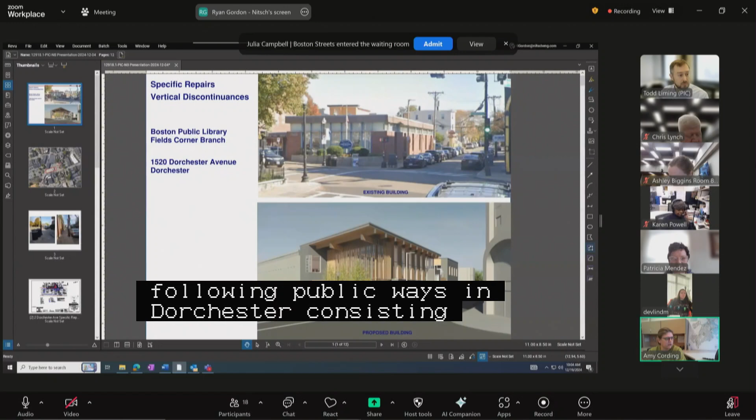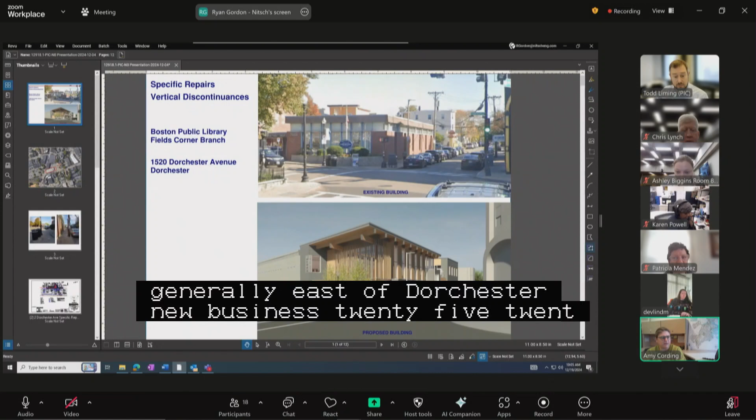All right, public hearings. Public hearing number 1 on a petition by the City of Boston Public Facilities Department for the making of specific repairs within the following public ways in Dorchester, consisting of curb realignment, sidewalk reconstruction, new and relocated pedestrian ramps, specialty pavements, street lighting infrastructure, street trees, planters, landscaping, traffic signal infrastructure, storm drain infrastructure, bike racks, trash receptacles, driveway curb cuts, and Silva Cell groundwater retention tree root protection system. Dorchester Ave at address number 1520, generally north of Park Street, generally east of Dorchester Ave, new business 12/5/2024, as shown on a set of plans entitled City of Boston Public Works Department Engineering Division Specific Repair Plans, 1520 Dorchester Ave, Public Way, Dorchester, 4 sheets dated November 22, 2024.

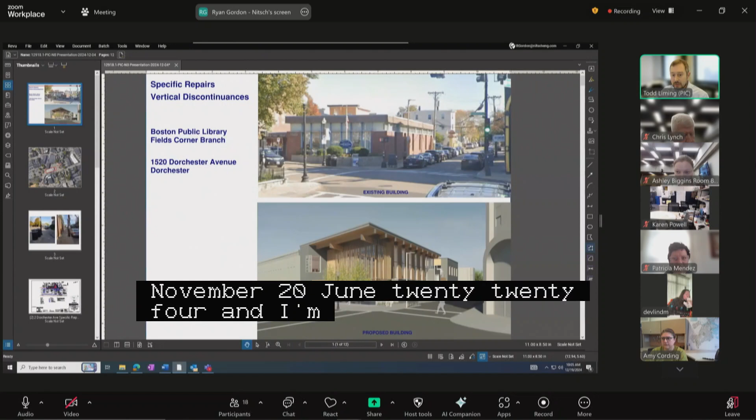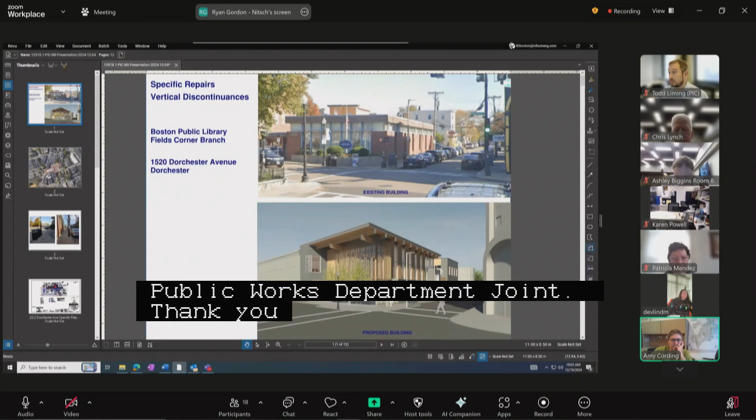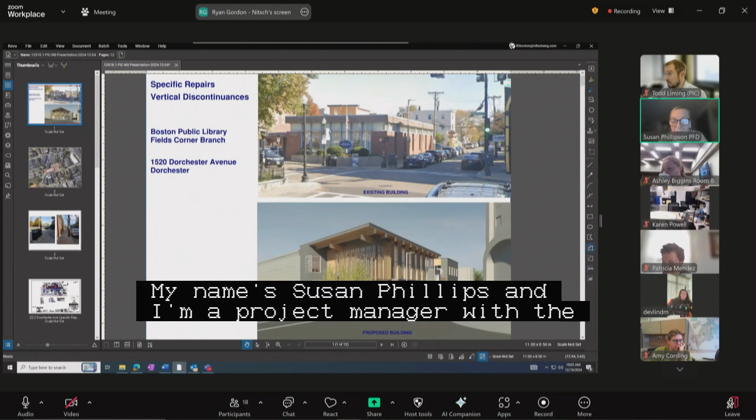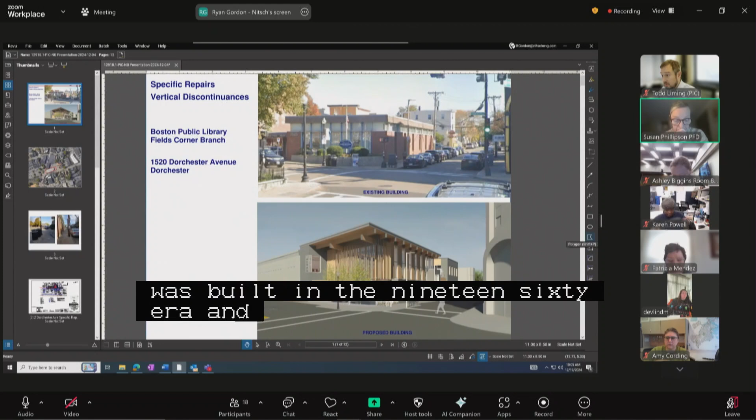Will the petitioners state their name and walk us through their presentation? Good morning, Commissioners, my name's Susan Phillipson, I'm the project manager with the Public Facilities Department, managing this project, the Fields Corner Library, located at 1520 Dorchester Ave in Dorchester, Mass. I'd like to give a brief summary: the project consists of replacing the existing single-story building, built in the 1960s era and currently 8,600 square feet, which will be demolished. The new Fields Corner Branch Library will be built as a replacement, programmed for approximately 14,700 gross square feet as a 2-story building. Thank you for your time, and I'll turn it over to Ryan Gordon of Nitsch, who can present the project's improvements.

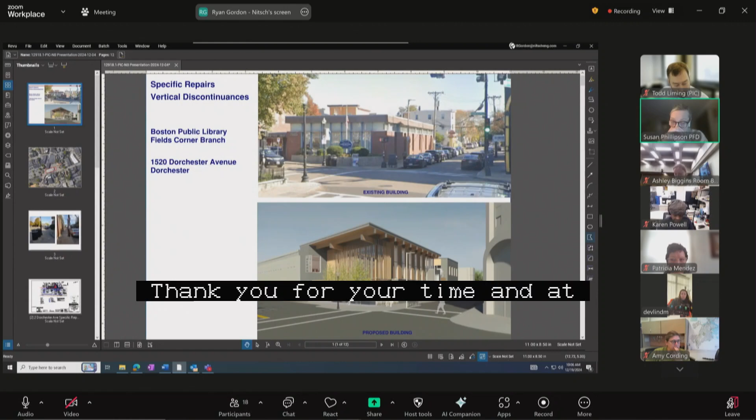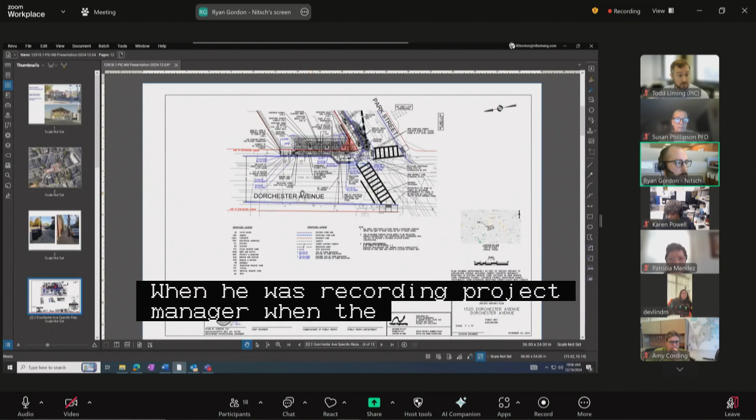Good morning, everyone, my name is Ryan Gordon, project manager with Nitsch Engineering. We have our specific repair plans here for Dorchester Avenue as well as Park Street. We have not made any changes to the plans from the new business hearing two weeks ago. The one update is that we are working with Chonglu on finalizing the LMI agreement for the trees on Dorchester Avenue. I'm happy to answer any questions.

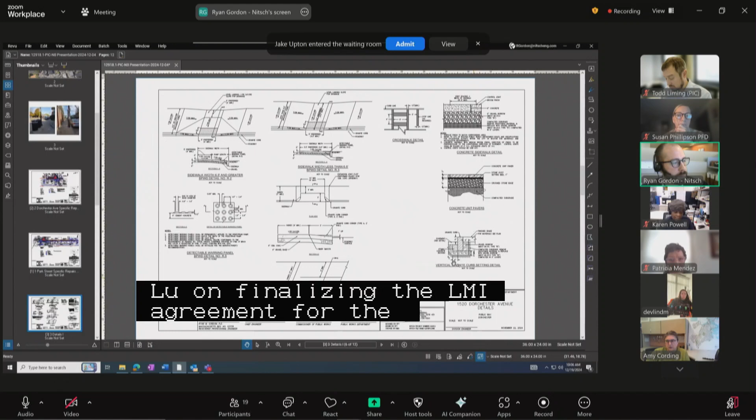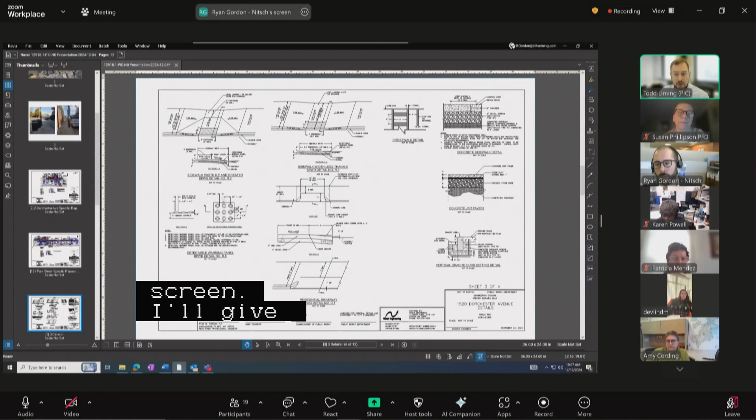Questions or comments by commission members, PIC staff, or the public? I'll mention to the public, if you wish to add testimony or ask questions, please use the raised hand function at the bottom of your screen. I'll give it just a moment. I don't see anyone, and I do not have any comments or issues with this action.

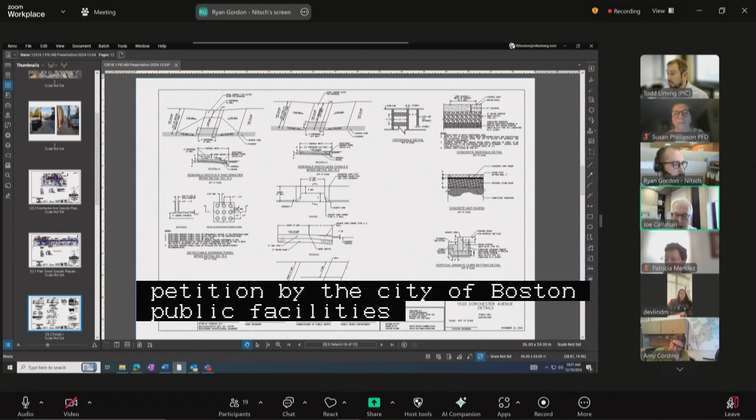I'll entertain a motion on public hearing item number 1. I make a motion to approve a petition by the City of Boston Public Facilities Department for specific repairs in the area of Dorchester Avenue and Park Street, as further read into the record by the chair. Second. All in favor? Aye. Aye. Great.

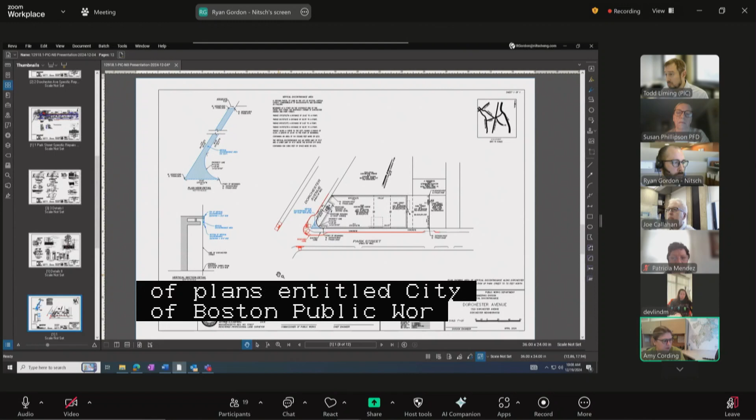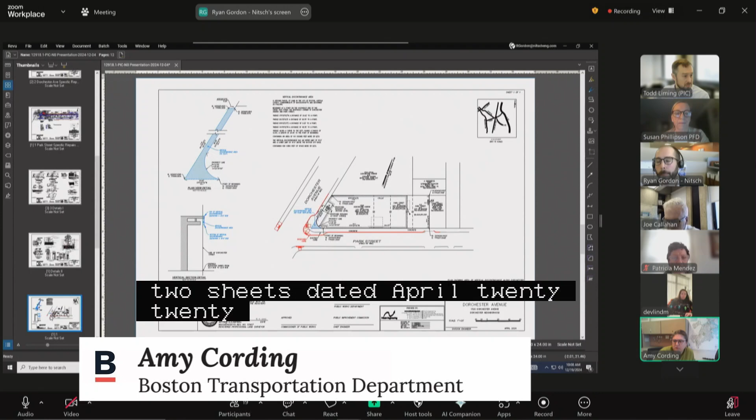Will the petitioner state their name and introduce their petition? Good morning again, Commissioners, it's Susan Phillipson with PFD. I'm not going to go through the summary of the project again, it is the same. I just would like to add that Chong and Boston Water and Sewer Attorney have reviewed and have no issues with the LMI. I just wanted to bring that up. I'll turn it over to Ryan.

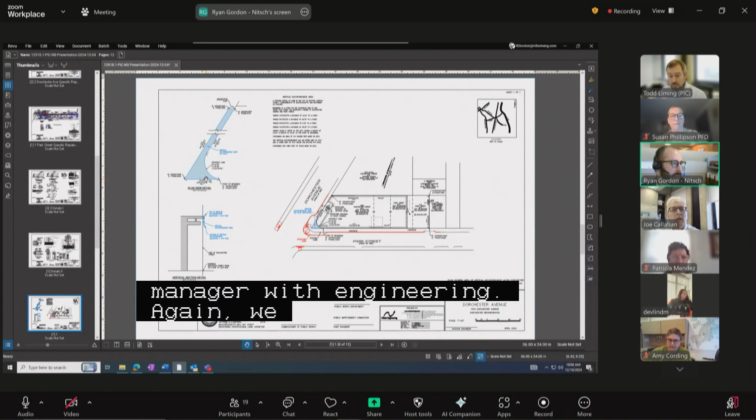Thank you, Ryan Gordon, project manager with Nitsch Engineering. Again, we have our vertical discontinuance plans, this is for the discontinuance on Dorchester Avenue. We have a plan and section here: 116 square feet and 696 cubic feet.

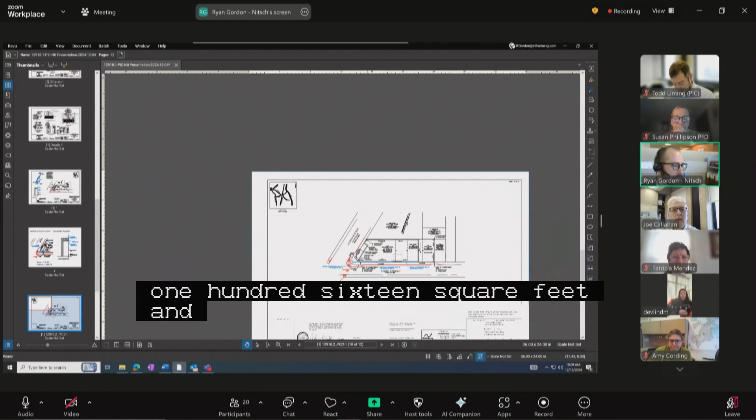And we have our 3 discontinuance areas with sections on Park Street. Here's a zoomed in version: 5 square feet and 20 cubic feet. The second one is a 13 square foot area with 255 cubic feet. And the third area is 7 square feet with 11 cubic feet total.

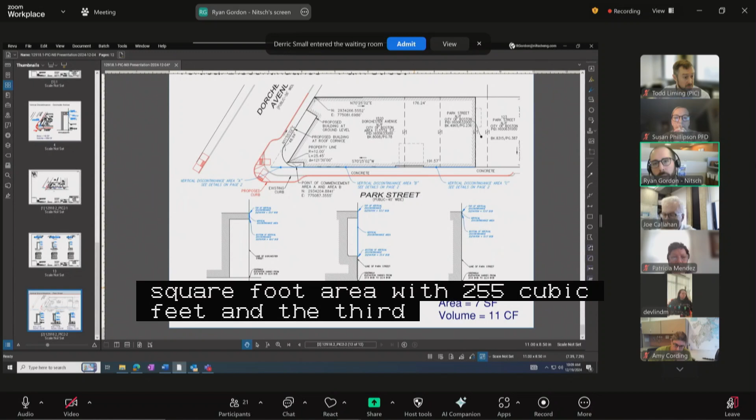And we have not made any changes to this from the new business hearing. Great. Questions or comments from commission members? PIC staff or public? All set.

I'll entertain a motion on public hearing item number 2. I make a motion to approve a petition by the City of Boston Public Facilities Department for a vertical discontinuance at Dorchester Ave and Park Street, as further read into the record by the chair. Second. All in favor? Aye. Aye. Motion passes.

Public hearing item number 3, on a petition by 9 McKay Place LLC for the acceptance of a pedestrian easement adjacent to the following public ways in East Boston: McKay Place on its southeasterly side at address number 9, northeast of Maverick Street on its northeasterly side, southeast of McKay Place. New business 12/5/2024, shown on a plan entitled City of Boston Public Works Department Engineering Division Public Pedestrian Easement Plan, McKay Place & Maverick Street, Boston, 1 sheet dated November 18, 2024.

My name is Brian Jones with Allen & Major. We're the site civil engineer and landscape architect. Maybe I'll share my screen just so. See, can I do that here? Yes.

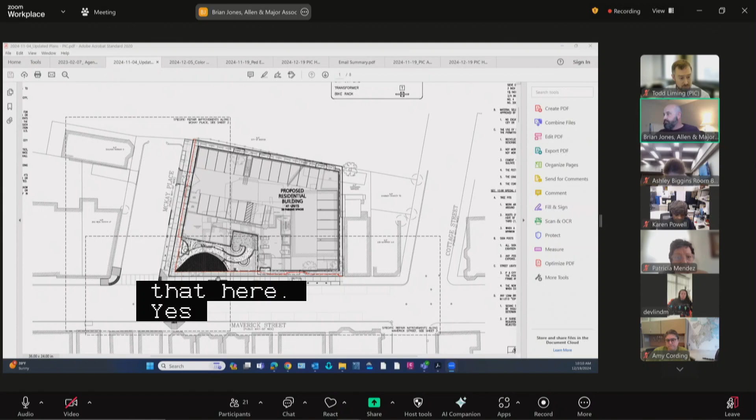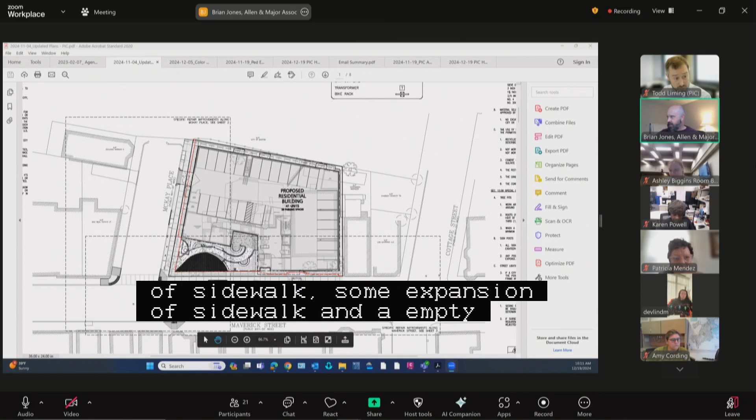All right, thank you. So it's a residential building, corner of McKay Place and Maverick Streets, 41 units, have some interior parking, and we're obviously here for work within the McKay Place and Maverick Street public ways. That work includes repair, replacement of sidewalk, some expansion of sidewalk, adding an MBTA bus stop, a bump out in the sidewalk, adding bike storage, outdoor bike storage, new street trees with some permeable pavement.

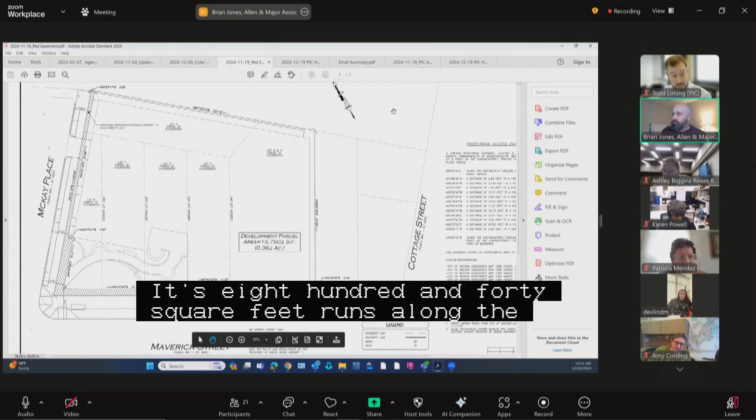So this section is just the pedestrian easement. Yeah, I apologize, then here it is. It's 840 square feet, runs along McKay Place and Maverick Street, and it's to accommodate an expanded sidewalk to provide at least 6.5 feet of concrete in addition to the pervious pavers that we have.

Great, thank you. Questions or comments by commission members? PIC staff or, oh, Joe? PIC staff or public? We're all set on the easement.

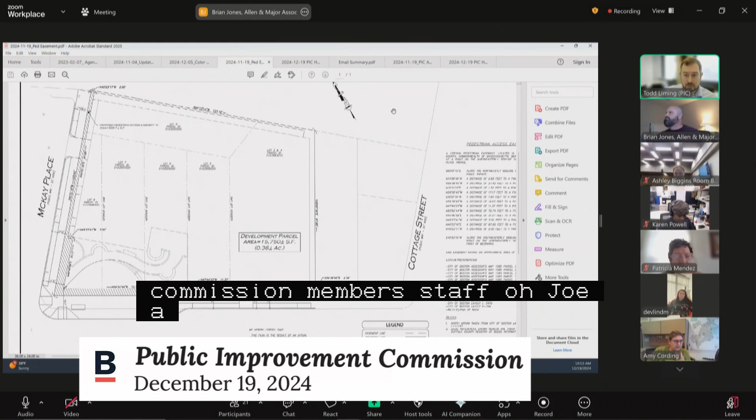I'll entertain a motion on public hearing item number 3. I make a motion to approve a petition by 9 McKay Place LLC for the acceptance of a pedestrian easement at McKay Place and Maverick Street, as further read into the record by the chair. Second. All in favor? Aye. Aye. Aye. Motion passes.

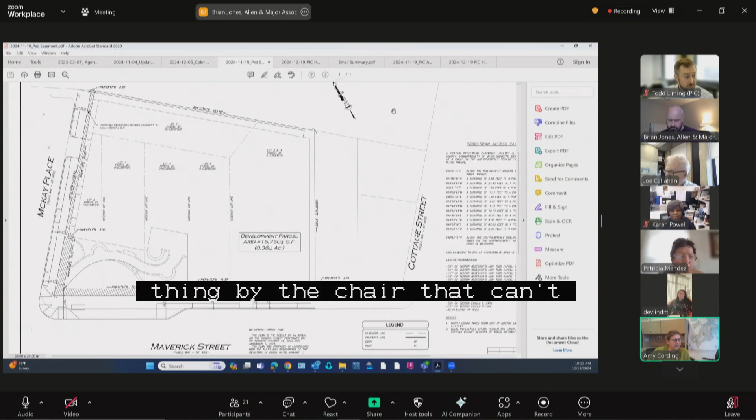Public hearing item number 4, on a petition by 9 McKay Place LLC for the making of specific repairs within the following public ways in East Boston, consisting of curb realignment, sidewalk reconstruction, as well as new relocated pedestrian ramps, specialty pavement, street lighting infrastructure, street trees, landscaping, green stormwater infrastructure, storm drain infrastructure, bike racks, and driveway curb cuts. McKay Place generally at address number 9, northeast of Maverick Street, generally southeast of McKay Place. New business 12/5/2024, shown on a set of plans entitled City of Boston Public Works Department Engineering Division Specific Repair Plan, McKay Place & Maverick Street, Boston, 8 sheets dated January 24th, 2024, revised November 4th, 2024.

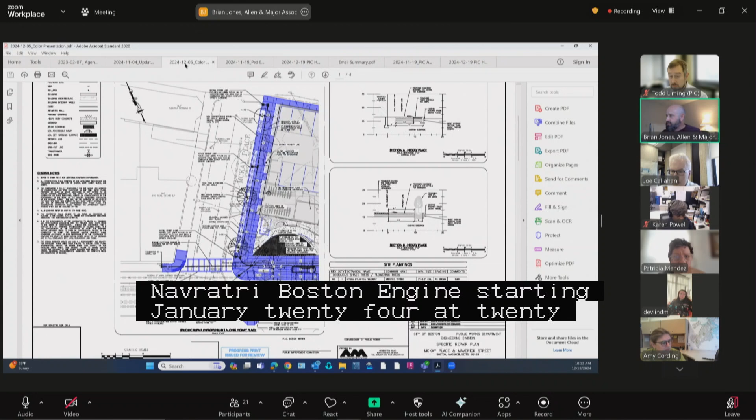Again, my name is Brian Jones with Allen & Major. We're the civil engineers and landscape architects for the project, and it is for sidewalk improvements on McKay Place and Maverick Street. The blue is the work within the public right-of-way and within that pedestrian easement that we just discussed.

Primarily, it's... All right, Mr. Jones, it's hard to hear you. Could you just speak a little louder, please? Sure thing. Just a little bit better?

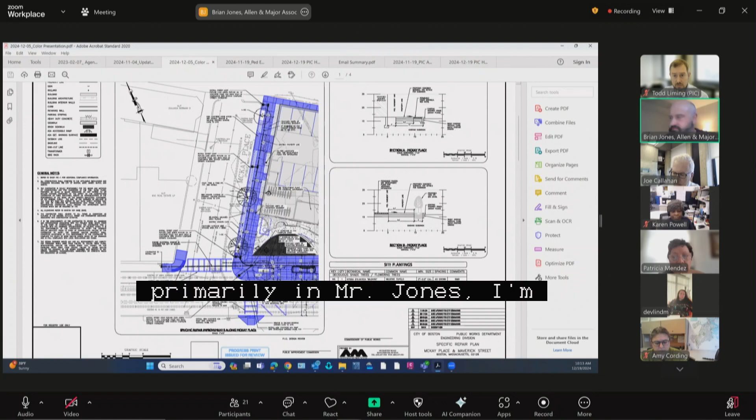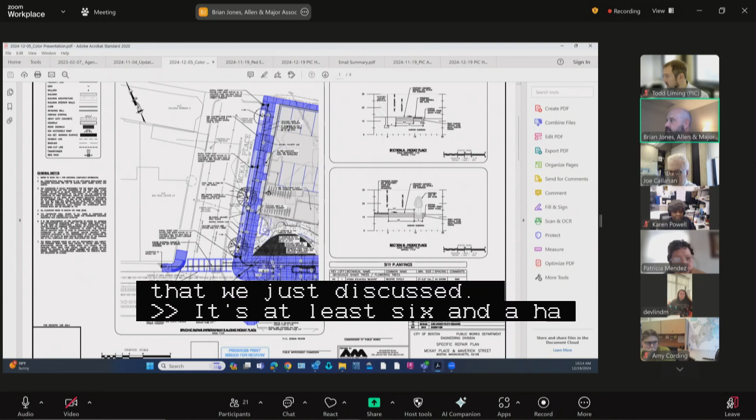Yeah, yes, okay. So the blue indicates the repair and replacement of the concrete sidewalk within McKay Place and Maverick Street. It's within the public right-of-way or that pedestrian easement that we just discussed. It's at least 6.5 feet wide, plus a strip of decorative pavers, permeable pavers, to facilitate the health and growth of the street trees that we're replacing.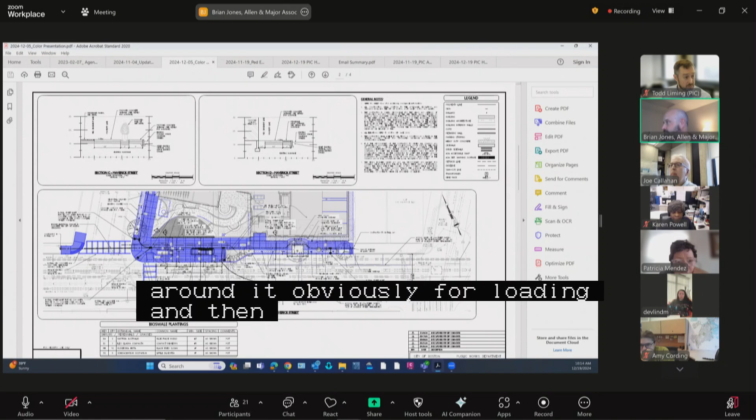We also are adding a bump out on Maverick Street to facilitate a new bus stop with space around it, obviously for loading, and then reconstructing some ADA ramps and restriping crosswalks. Adding bike racks, as I mentioned previously. So basically a repair, replacement, and enhancement of what's there. I can take questions if there are any, or we can go ahead and get into specifics.

Questions or comments by commission members? Yes, Madam Chair, this is Patricia. Thank you for your presentation, Mr. Jones. I have a question on the

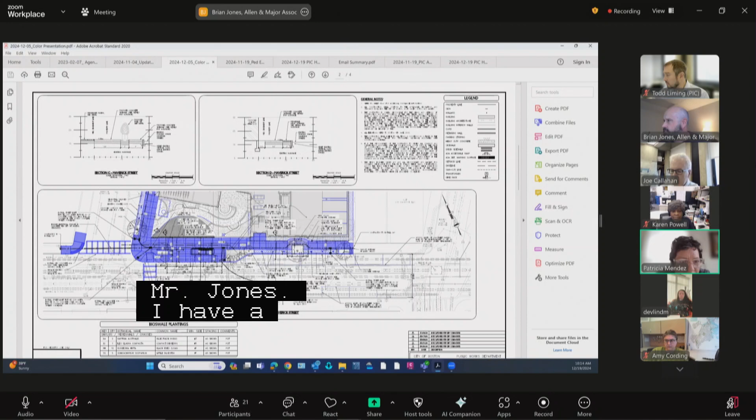west side, on the crossing on the west curb cut. Is it possible to do a straightforward design, a perpendicular curb cut to meet the curb cut on the right side of the crossing on the street? You're talking about this right here? Yes, yes. Instead of making it the curvy blended transition, is it possible to do either a raised crossing or a perpendicular curb cut?

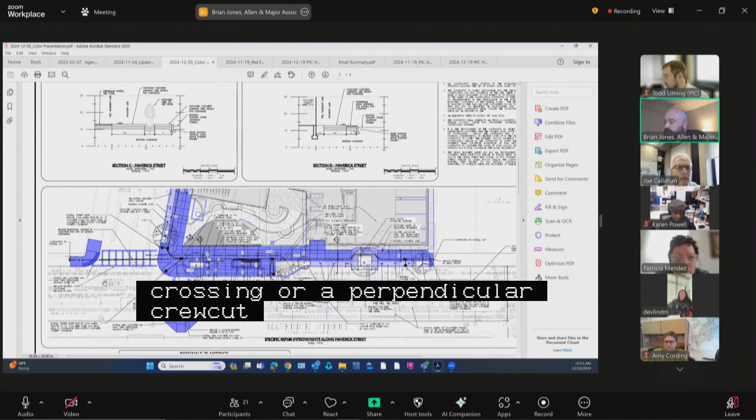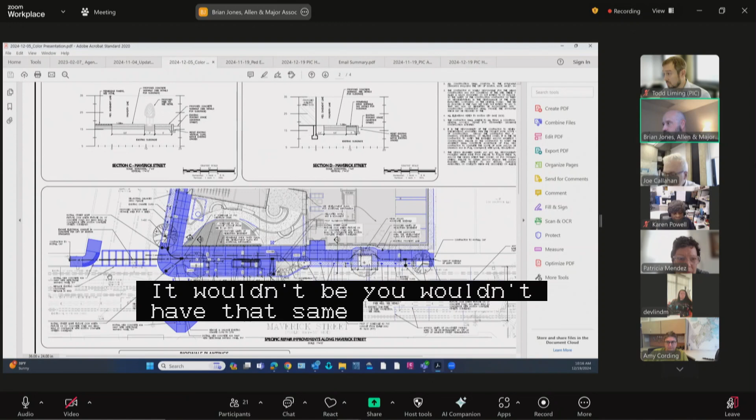I think that's probably something we can look into, but we do have two curb transitions that come down, so you do end up with the level area being the curved area. I'm not sure we could accommodate that. I know what you're saying, but I don't think the geometry would work there and fit within the public way. If you raise it, you wouldn't have that same issue. No, I understand, but raising obviously creates other issues with stormwater and plowing and so forth.

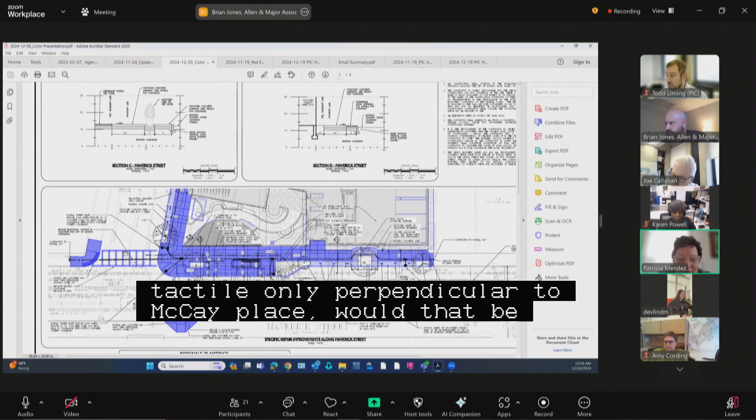The issue with this configuration is that, you know how you have the curb detectable warning strips? That might give a constituent the impression that there's a crossing on the other side. So if we can rework that to have the tactile strip only perpendicular to McKay Place, would that be acceptable? If you can make the geometry work, yes. Okay, then we'll do that. We're happy to have a conversation. Thank you.

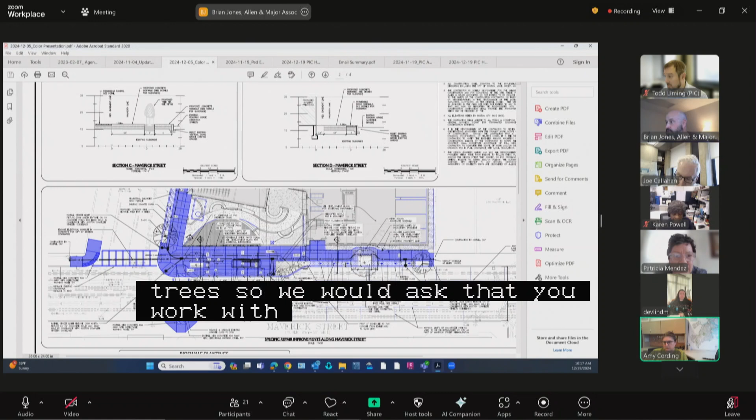Your ramp work on the other side is getting you very close to what I believe are existing trees, so we would ask that you work with the Parks Department on an adequate tree protection plan for your work. This area here, well, I think it's further down that you're retaining them, right? So there's just this one large ash tree that exists and is being retained, and there's some special measures being taken to protect that.

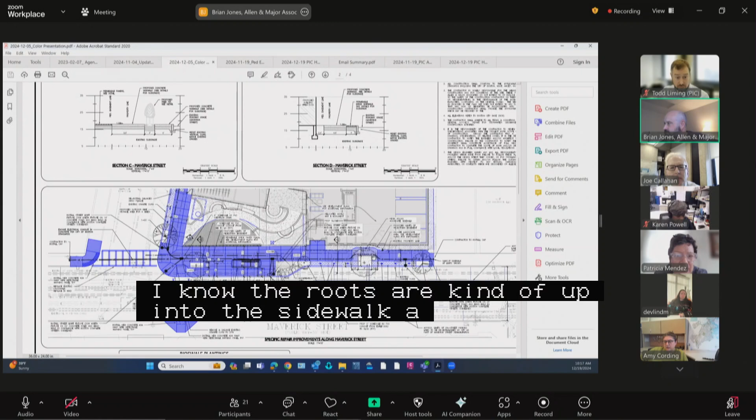I know that the roots are kind of up into the sidewalk and have heaved it, so we're going to be using a resin-bound aggregate sidewalk in that area. Yeah, I think we just want that to be coordinated with the Parks Department, make sure that's consistent with how they do things. Yes. Any other questions? Oh, sorry.

We received an inquiry from the Parks Department about this project and that tree specifically, and they were concerned that adequate tree protection measures were not currently in place. So we really want to stress to the project team that that needs to be taken seriously, and that you should be working with Max Ford Diamond at the Parks Department on those details. Okay.

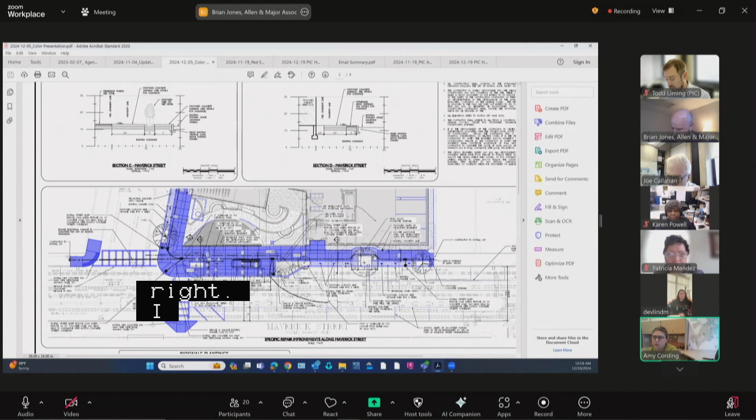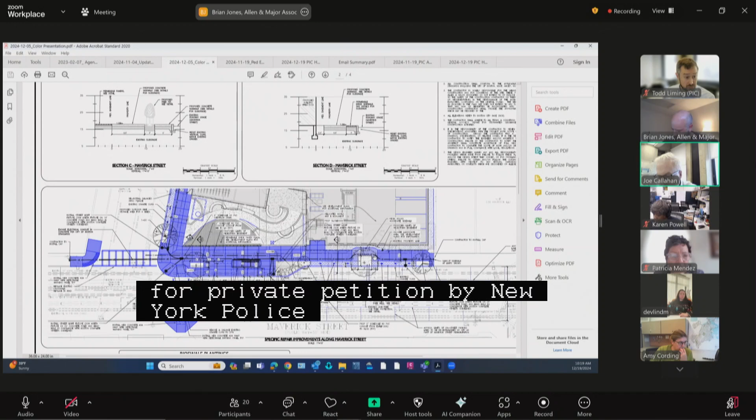Any other comments or questions? PIC staff or public? All set? All right, I will entertain a motion on public hearing item number 4, contingent upon a redesign of the ramp to the satisfaction of the Commission for Persons with Disabilities, and a tree protection plan to the satisfaction of the Parks Department. I make a motion to approve a petition by 9 McKay Place LLC for the making of specific repairs in McKay Place and Maverick Street, contingent on the ramp and the tree protection, and as further read into the record by the chair. Second.

All in favor? Aye. Aye. Great. Thank you very much for your time.

Thank you. Public hearing item number 5, on a joint petition by HSS Partners LLC, Diamond 89 LLC, and 9 to 11 Hillsboro Street Condominium Trust, for the abandonment of any and all rights to travel the public may have had within a portion of Hillsboro Street, a private way open to public travel, Dorchester, from a point approximately 80 feet north of Groom Street to its northerly terminus. New business 12/5/2024, is shown on a plan entitled City of Boston Public Works Department Engineering Division Abandonment Plan, Hillsboro Street, private way open to public travel, Dorchester, one sheet dated March 2024, revised September 2024.

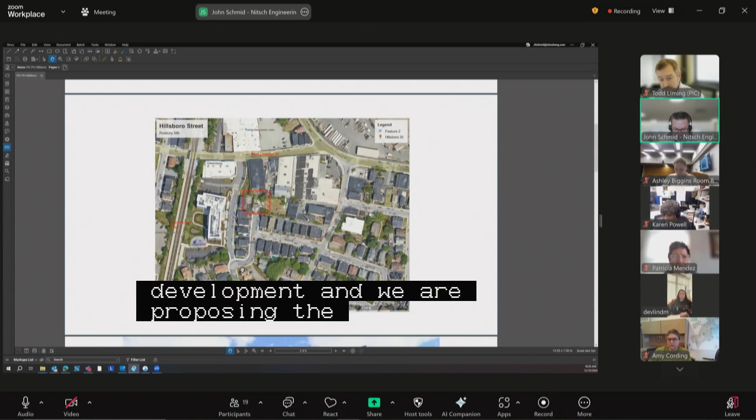Good morning, Commissioners. Can you see my screen? Yes. I can't, so I hope this goes well. I'm John Schmid with Nitsch Engineering, and with me is Brian Goldstead from New Atlantic Development. We are proposing the abandonment of a small section of an unimproved private way in this Roxbury neighborhood, just southeast of Cottage Street and east of the commuter rail.

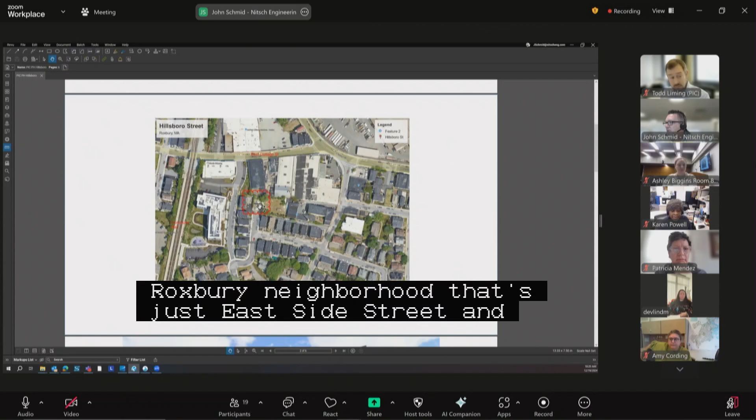As you can see in this view here, this is the section that's being abandoned. It's basically just served as a gravel-covered parking lot that doesn't bring much to the neighborhood. What we're proposing here, once the abandonment is approved, this frees up the parcel to serve as a parking lot and driveway for a proposed residential building that will consist of 21 units, 4 stories of artist loft condominium housing.

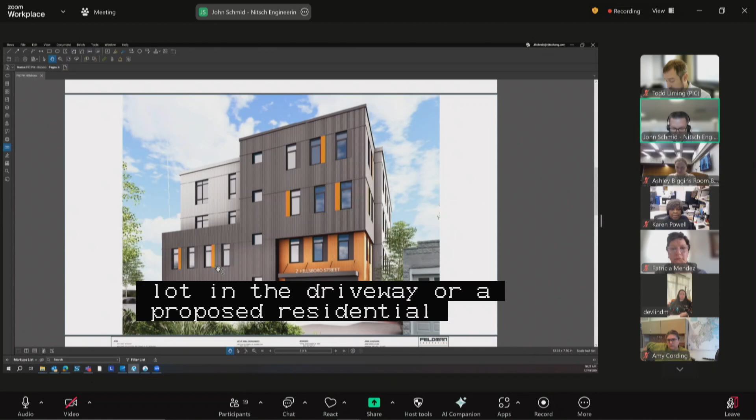There's also an Eversource pole that will be maintained and used as part of the development, and Eversource has also blessed this proposal. The title has been all worked out as far as I understand.

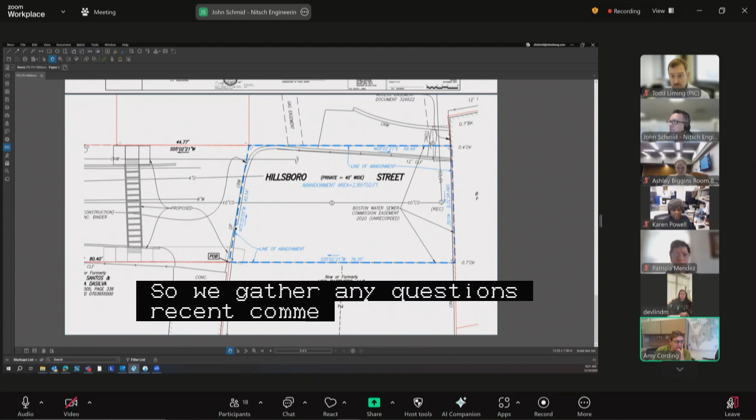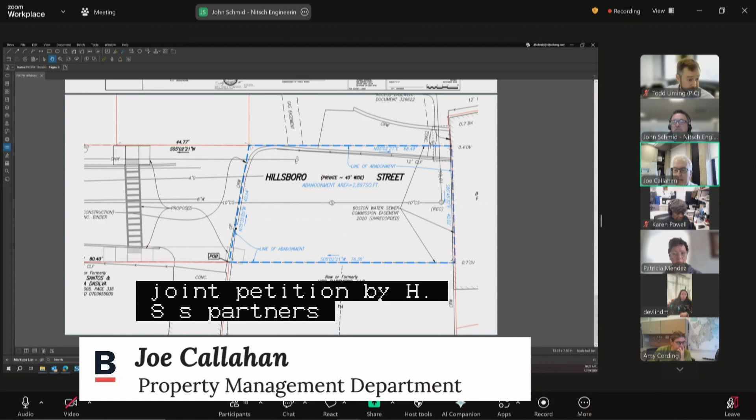Are there any questions or comments by commission members, PIC staff, or the public? All set? I'll entertain a motion on public hearing item number 5. I make a motion to approve a joint petition by HSS Partners LLC, Diamond 89 LLC, and 9-11 Hillsboro Street Condominium Trust for the abandonment of a portion of Hillsboro Street, as further read into the record by the chair. Second. All in favor? Aye, aye, aye. Thank you. Happy holidays.

Public hearing item number 6, on a joint petition by Upton Belgrade Investment Partners LLC and Clay Consolidated LLC for the acceptance of a pedestrian easement adjacent to Anawan Avenue, public way, West Roxbury, located on its westerly side, north of Belgrade Avenue, near 361 Belgrade Avenue. New business 12/5/2024, shown on a set of plans entitled City of Boston Public Works Department Engineering Division Pedestrian Easement Plan, Anawan Ave, 361 Belgrade Ave, West Roxbury District, one sheet dated November 12, 2024.

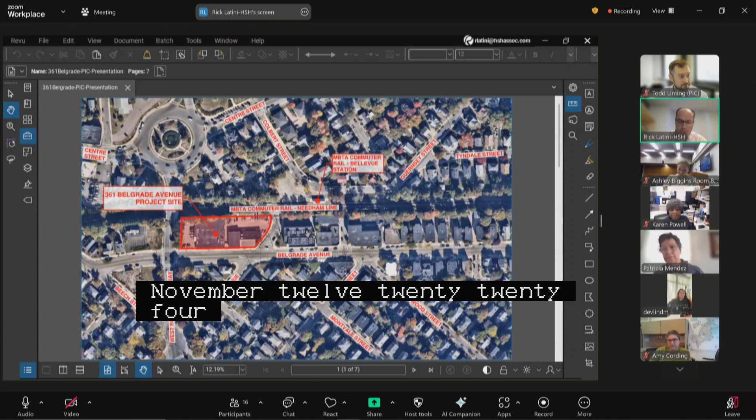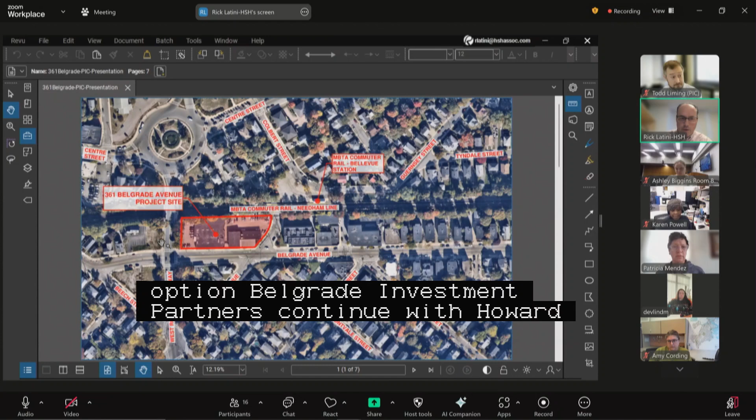Stein Hudson will give a brief presentation. You can see the site. I have Jake Upton present as well, representing the petitioner, Upton Belgrade Investment Partners. Once again, Rick Latini with Howard Stein Hudson, doing civil and traffic engineering for this project. The project is in West Roxbury, located against West Roxbury Parkway, Belgrade Avenue, and Anawan Ave, and this is the Needham branch of the MBTA commuter rail here.

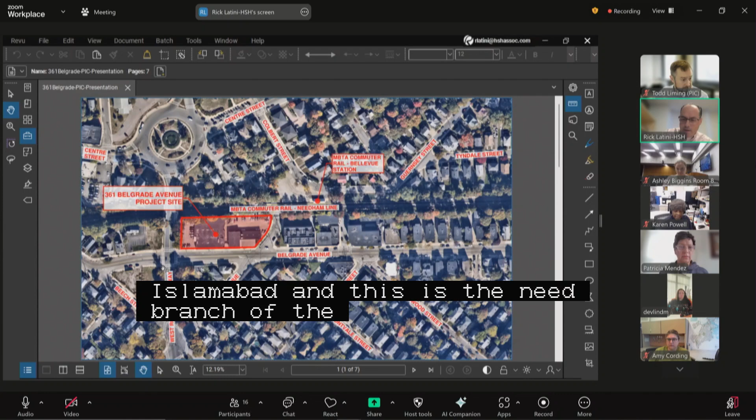The existing site is mostly impervious, with surface parking and buildings for the previous Clay Auto Center. This is all being demolished for a new residential building, 5 stories with 124 units, and ground surface parking for about 85 vehicles.

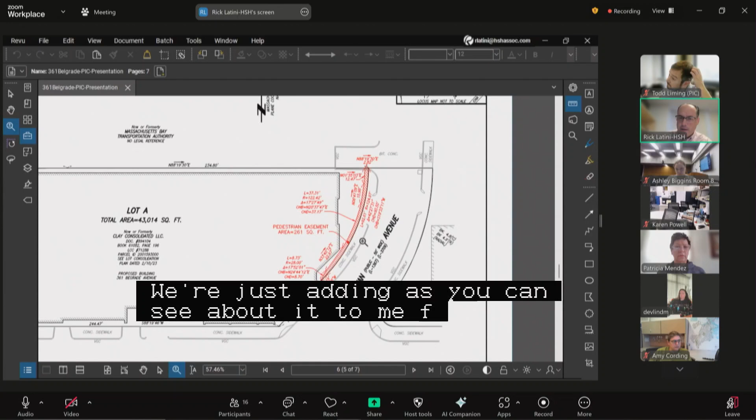Just further on down the street, for this particular petition is the easement. I'm going to zoom in. We're adding about a 3-foot wide easement here so we can have a 6-foot wide cement concrete sidewalk travel path and still provide a furnishing zone. The reason this ends here, you'll see in the specific repairs, is we are realigning this curb to be perpendicular with Belgrade Ave, so we'll provide the pedestrian easement with room for a furnishing zone.

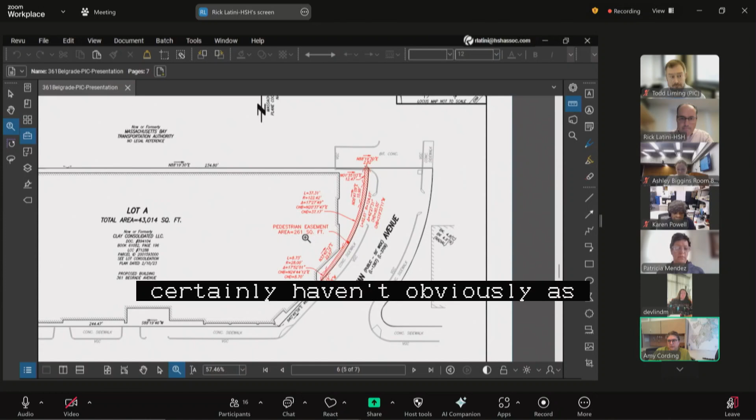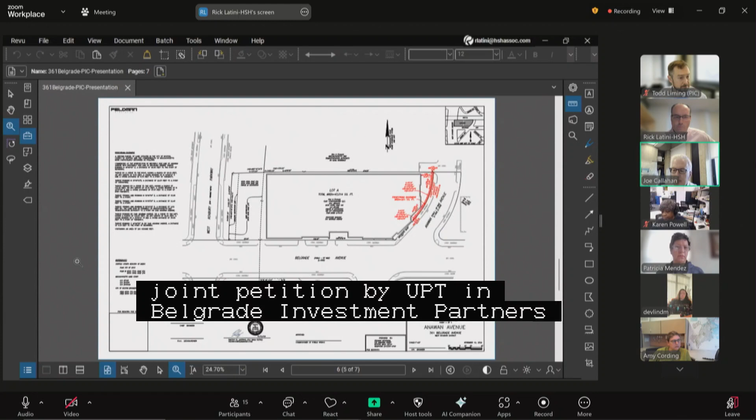There were no questions on this at new business, but I hand it over for any comments now or for a vote. Questions or comments by commission members, PIC staff, or the public? We're all set on the easement. I'll entertain a motion on public hearing item number 6. I make a motion to approve a joint petition by Upton Belgrade Investment Partners, LLC, and Clay Consolidated, LLC, for the acceptance of a pedestrian easement adjacent to Anawan Avenue, as further read into the record by the chair. Second. All in favor? Aye. Great.

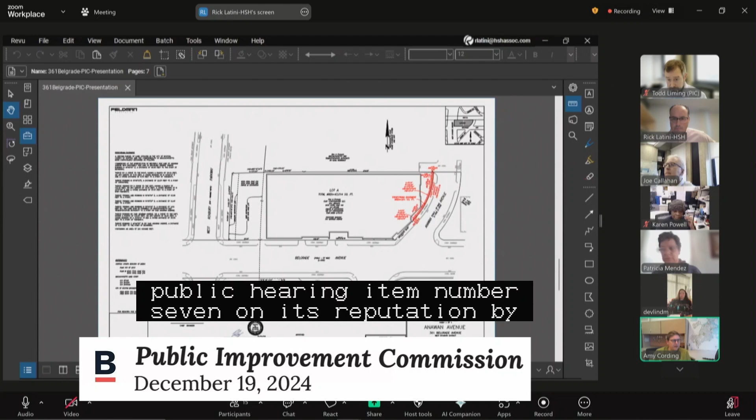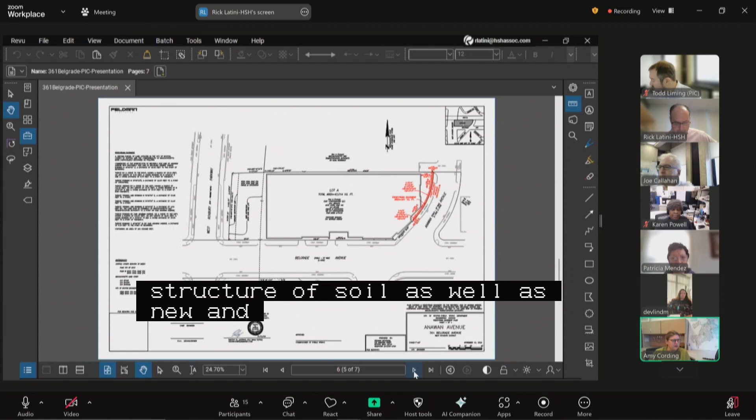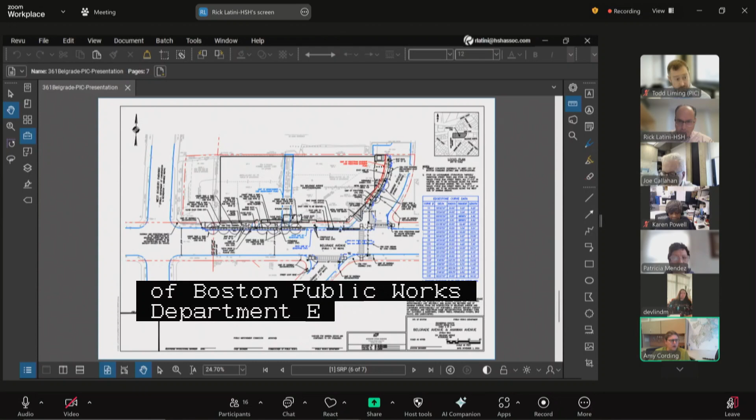Public hearing item number 7, on a joint petition by Upton Belgrade Investment Partners LLC and Clay Consolidated LLC for the making of specific repairs within public ways in West Roxbury, consisting of curb realignment, sidewalk reconstruction with structural soil, new and relocated pedestrian ramps, specialty pavement, street lighting infrastructure, street trees, planters, landscaping, storm drain infrastructure, street furniture, bike racks, median islands, and driveway curb cuts on Belgrade Avenue, generally at address 361, between Anawan Avenue and West Roxbury Parkway, and Anawan Avenue north of Belgrade Avenue. New business 12/5/2024, shown on a set of plans entitled City of Boston Public Works Department Engineering Division Specific Repair Plan, Belgrade Avenue and Anawan Avenue, Public Ways, 361 Belgrade Avenue, West Roxbury, 4 sheets dated November 1st, 2024.

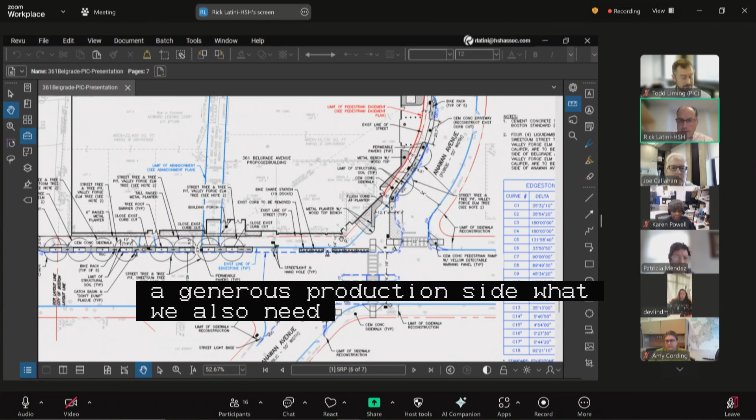Thank you. Rick Latini again with Howard Stein Hudson. Continuing from the easement portion, this is the realigned curb I was talking about, to provide this area where we have some planting and still have a generous pedestrian sidewalk. We're also moving the curb line about 4 feet along Belgrade Avenue to provide a furnishing zone. The cement concrete sidewalk will range anywhere from 7.5 feet to 9.5 feet.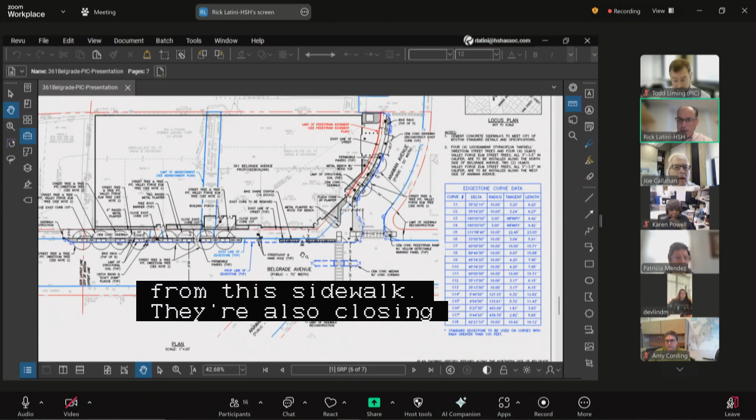In the furnishing zone, we have street trees, new pendant street lights, and permeable pavers. These planted areas will actually be flush, so they'll take the runoff from the sidewalk. We're also closing the 4 curb cuts along Belgrade Ave—those will all be closed, so there will be no curb cuts on Belgrade Ave. We'll be modifying an existing curb cut on Anawan Ave that accesses the 85 parking spots underneath the building.

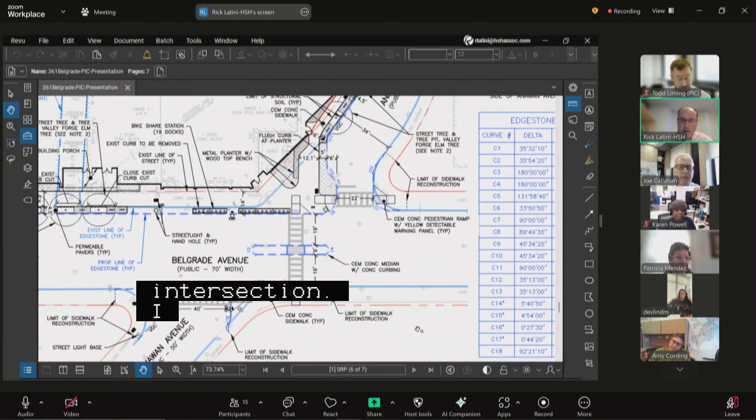One of the big things that came up last week, a positive thing actually, was we're tightening up this intersection. We've worked closely with Boston Transportation Department and Boston Planning Department on several iterations and have come to this final solution here. This is widening.

This crossing here is currently 60 feet, narrowed down to 22 feet. This one here is 77 feet, narrowed to 40 feet.

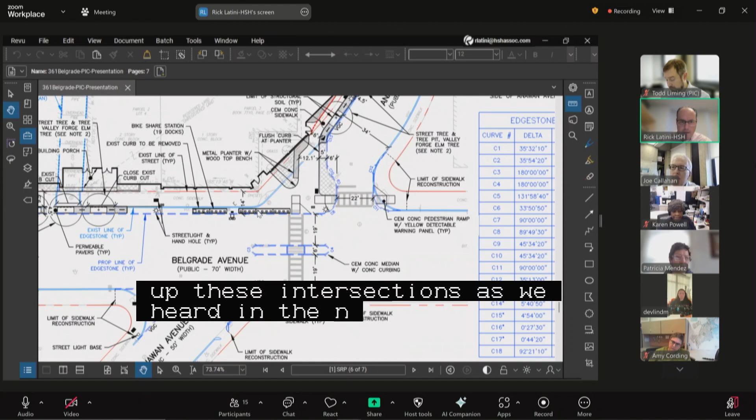Also importantly, we're tightening up these intersections because, as we heard in the new business, a lot of people fly through here because this is a wide open intersection today. As mentioned, because we're moving the sidewalk on Belgrade Ave, the roadway width here shrinks by about 6 feet, from 50 to 44 feet or so.

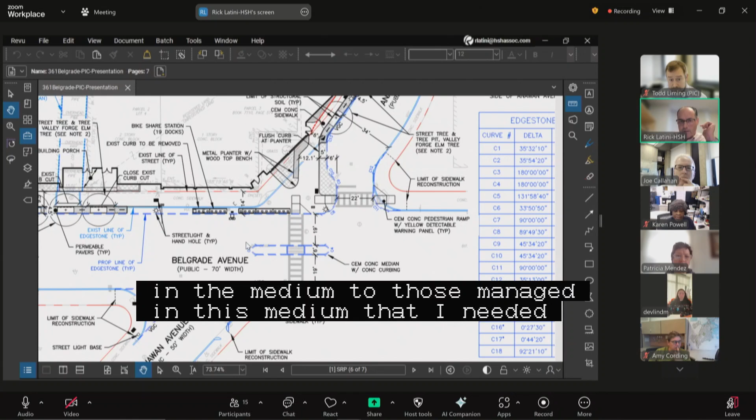The only thing that's changed since new business was I showed the detectable warnings in the median, so those were added. And this median was shifted a tiny bit this direction to allow left turns into our site, but we also extended this side of the median to further slow down left turns on Anawan Ave, though it's only a matter of a few feet.

So there were no issues at new business except for the detectable warning panels, which have been added. I will send it back to the commission for any comments or a vote. Thank you.

Questions or comments by commission members?

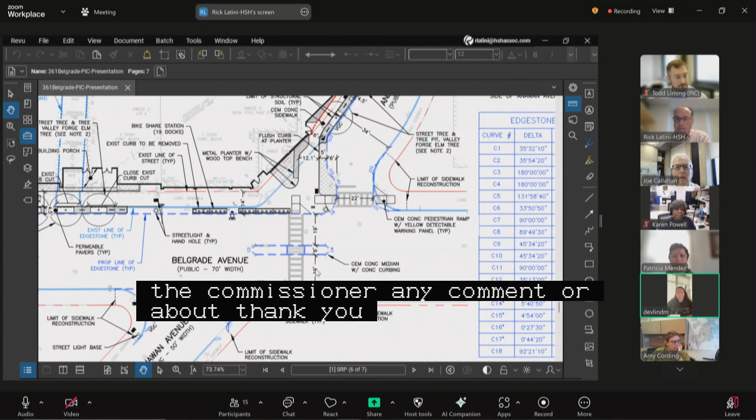Hi Rick, this is Denise Devlin from Water and Sewer. If you can, please make sure any of the new catch basins are updated on the site plan. Yep, actually we just sent new site plans to Phil LaRock yesterday, which included this catch basin that was added since he first arrived, so he has that in front of him right now. Thank you. Yep, thank you.

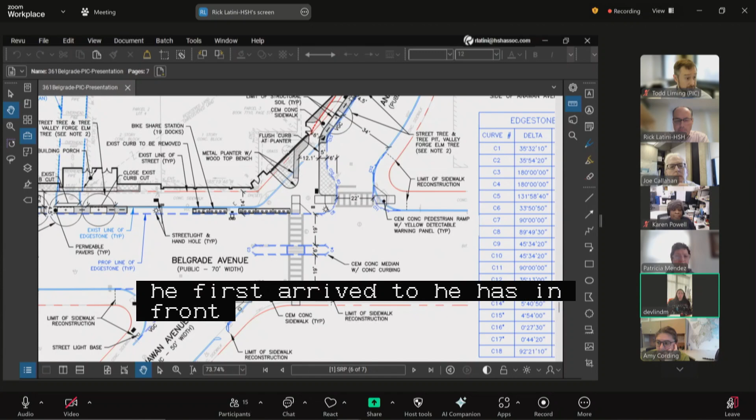PIC staff or public? All set on this. I'll entertain a motion on public hearing item number 7.

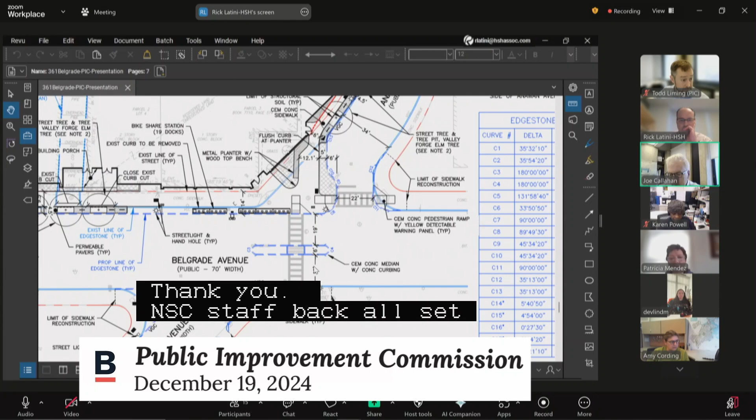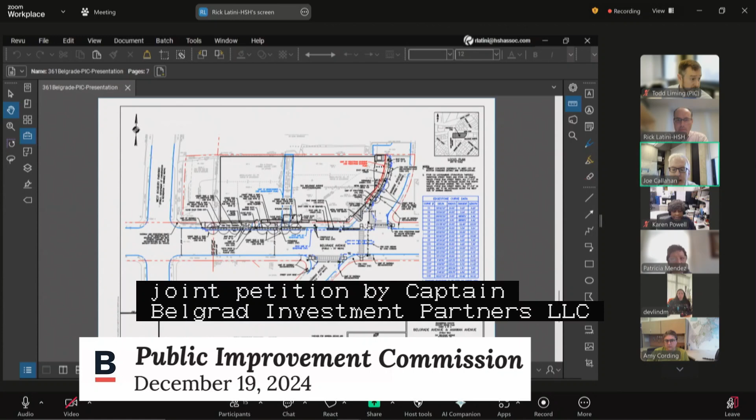I make a motion to approve a joint petition by Upton Belgrade Investment Partners LLC and Clay Consolidated LLC for the making of specific repairs in the area of Belgrade Avenue and Anawan Avenue, as further read into the record by the chair. Second. All in favor? Aye, aye, aye. Great. Public hearing item number 8.

On a joint petition by Upton Belgrade Investment Partners LLC and Clay Consolidated LLC for the abandonment of any and all rights to travel the public may have within the entirety of Belgrade Terrace, a private way open to public travel, West Roxbury, from Belgrade Avenue to its northerly terminus, new business 12/5/2024, as shown on a plan entitled City of Boston Public Works Department Engineering Division Abandonment Plan, Belgrade Terrace, 361 Belgrade Avenue, West Roxbury, District 1, sheet dated November 12th, 2024.

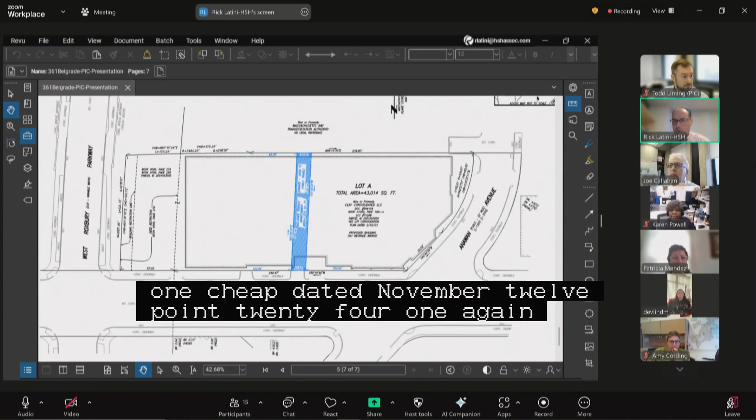Rick Latini again. Yeah, this is actually just a private way, only 15 feet wide, and it apparently only served these two lots back before they were consolidated, because this actually ends at the MBTA commuter rail, and there's a slope here, so it really doesn't provide any type of access for anybody else. The only utilities here are sewer and water service, which are no longer used.

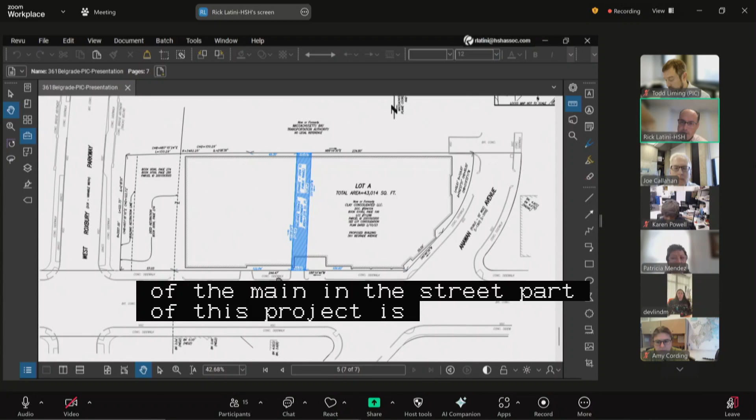They'll be cut and capped at the main and the street as part of this project. So there doesn't seem to be any use for this private way anymore, so we'd like to abandon it and send it back to the commission. There were no questions on new business for this project either. Questions or comments by commission members?

PIC staff or public? I will just mention that the title opinion was finalized and submitted, and we did not find any issues with it, so that's all set.

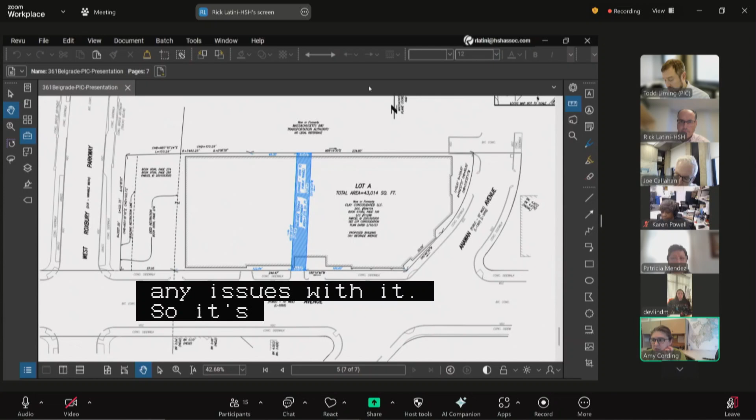Great, I will entertain a motion on public hearing item number 8. I make a motion to approve a joint petition by Upton Belgrade Investment Partners LLC and Clay Consolidated LLC for the abandonment of any and all rights of travel the public may have in the entirety of Belgrade Terrace, as further read into the record by the chair.

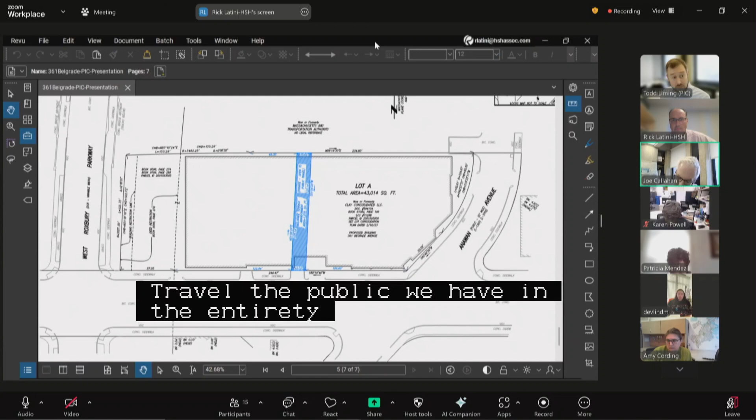Second. All in favor? Aye, aye, aye. Great, thank you very much. Passes, thank you.